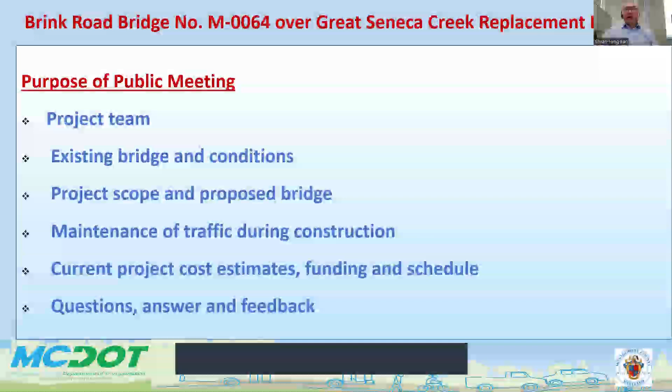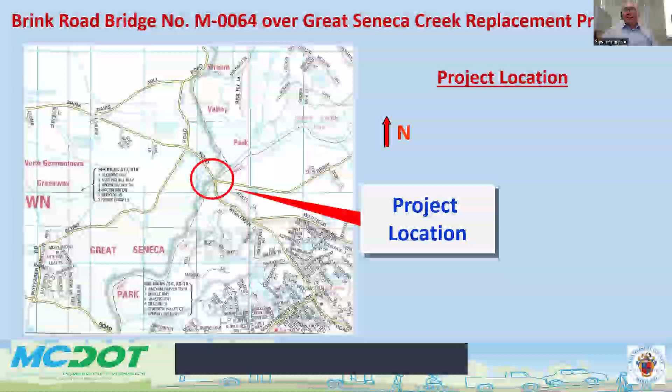The Brink Road Bridge is within the boundary of the Agriculture and Rural Open Space Functional Master Plan. The 2023 Master Plan Highways and Transitway classifies Brink Road as a county connector with 2 lanes, and the Montgomery County Bicycle Master Plan proposes a side path on the south side of Brink Road.

The roadway is posted at a 35 mph speed limit. In 2022, the traffic count on the bridge was 12,000 vehicles per day during the weekday. The bridge is not listed as a historical structure, but there's a historical marker nearby.

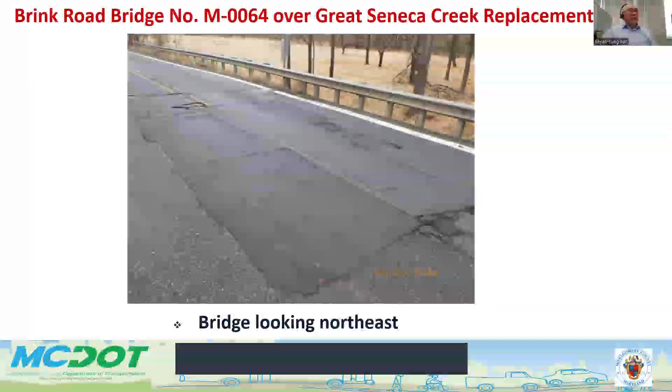It says there has been a bridge at this location since about 1800. This slide is standing on the approach near the Whitman and Brink Road intersection, looking at the bridge. The photo was taken during the February 2024 bridge inspection. Next, we're going to talk about the existing bridge and its condition.

The bridge was originally built in 1936 and had major reconstruction in 1972. It is a 58 foot long, single span steel beam bridge with asphalt filled on corrugated metal deck plank. The structure carries 2 lanes of traffic and has over 23 feet 6 inches of clear roadway width, with W beam railing on the sides.

The bridge sits on a concrete abutment. It is not posted for weight restriction at this point in time, and currently the bridge closes a couple times a year due to flooding of the Great Seneca Creek.

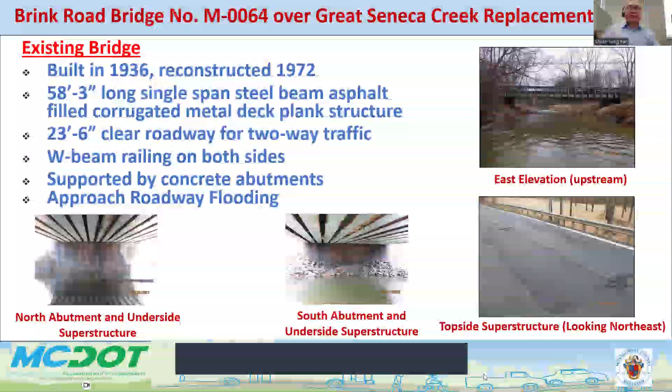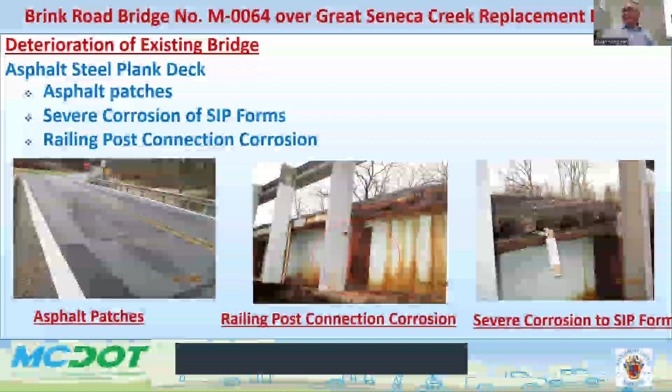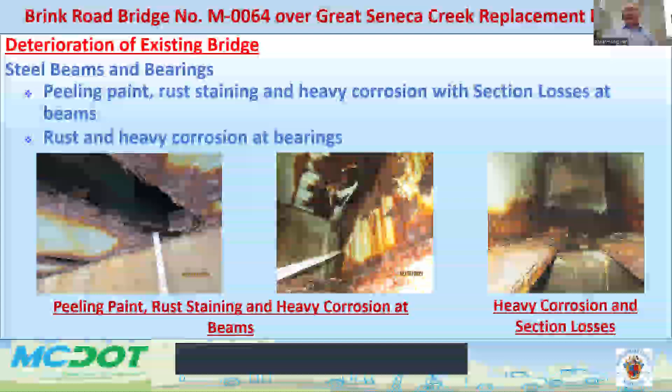Any maintenance work is required there. That's why you see so many rusted sections, section loss, and paint peeling off.

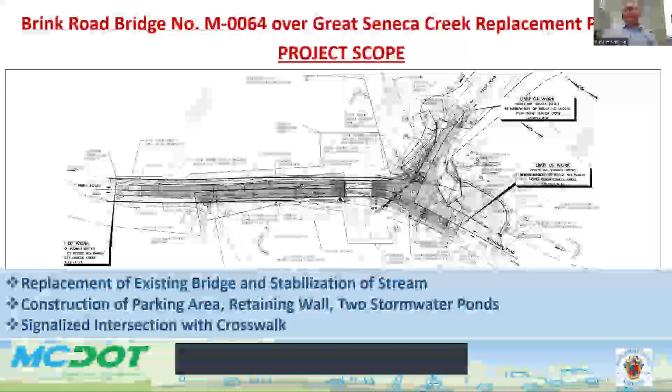The proposed bridge will be the same length, 58 feet 3 inches, single span, with precast pre-stressed concrete double T-beams and a minimum 8.5-inch concrete overlay, carrying two 11-foot lanes and a 6-foot shoulder for over 34 feet of clear roadway width. It will also include a 1-foot-8 curb and a 3-foot-6 high metal railing on both sides, for a total out-to-out bridge width of 37 feet 4 inches.

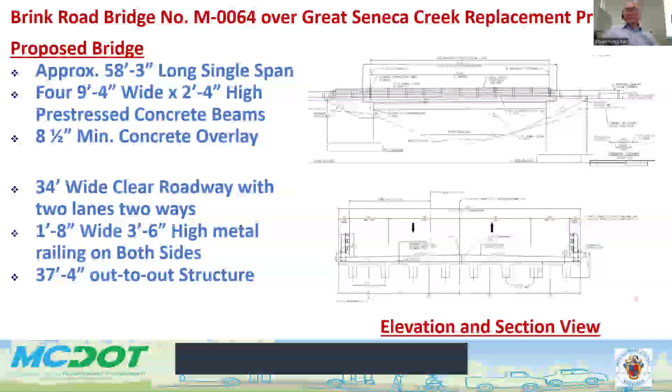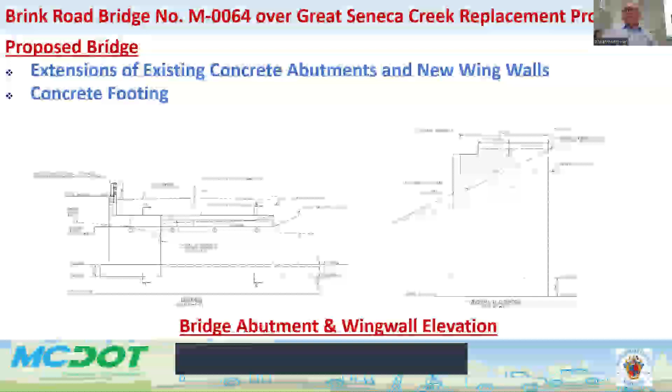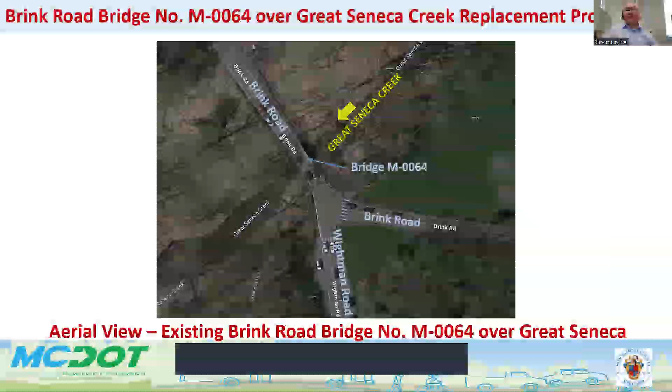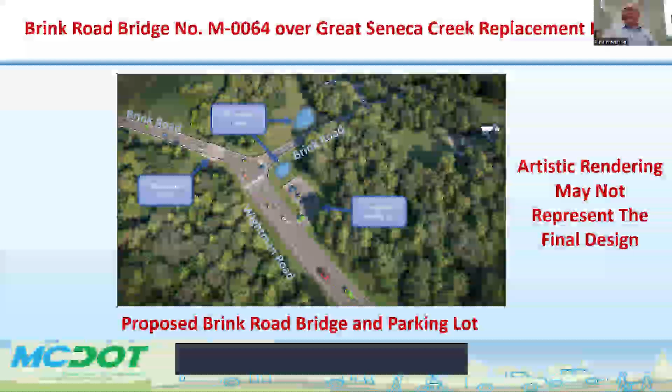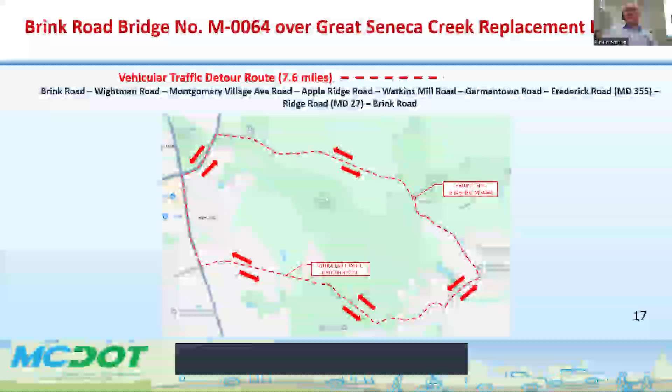Now we come to the project scope, funding, and the stage that we stand. Currently, the project is in a preliminary design stage, and it will have 80% federal funding and 20% county funding. Our current estimate is $900,000 for engineering cost, and $5.7 million for construction and construction management.

Currently our estimate is that the design will be completed in the fall of 2027, to allow for advertising and bidding, and awarding a contract. So the current estimate is that construction will start in the summer of 2028 and finish in the spring of 2029.